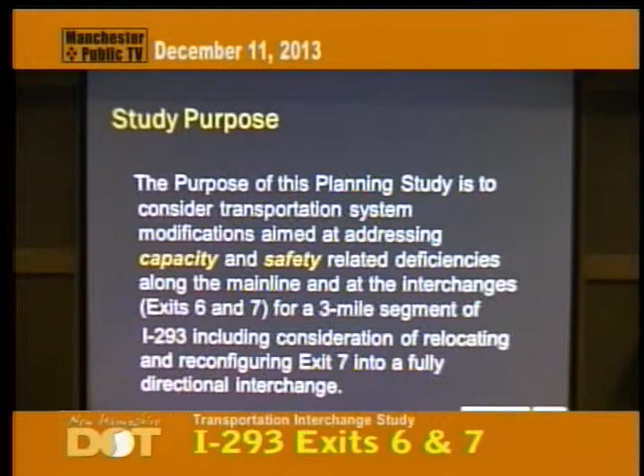We've been working very closely with the Technical Advisory Committee. They've been very helpful to us throughout the process. On that committee included not only the New Hampshire Department of Transportation and the Federal Highway Administration, but also representatives from the Southern New Hampshire Planning Commission, representatives of the City of Manchester, the Town of Goffstown, Town of Hooksett, the Greater Manchester Chamber of Commerce, the Hooksett Chamber of Commerce, the Manchester Community College, and also Senator Boutin sits on that committee.

Throughout the study, we've really tried to focus on public outreach and provide as much information as possible. And in doing that, we've had 5 public informational meetings, so this is our 5th and final meeting for this planning study. We also met 9 times with the Technical Advisory Committee. And then we had a series of briefings with each of the communities, which included meeting once with the Hooksett Town Council, once with the Manchester Board of Mayor and Aldermen, once with the Goffstown Selectmen. We had a brief presentation before the Infrastructure Committee at the Greater Manchester Chamber of Commerce. And we've also had a couple of meetings with the Southern New Hampshire Planning Commission, again just to share information as we're moving through the study.

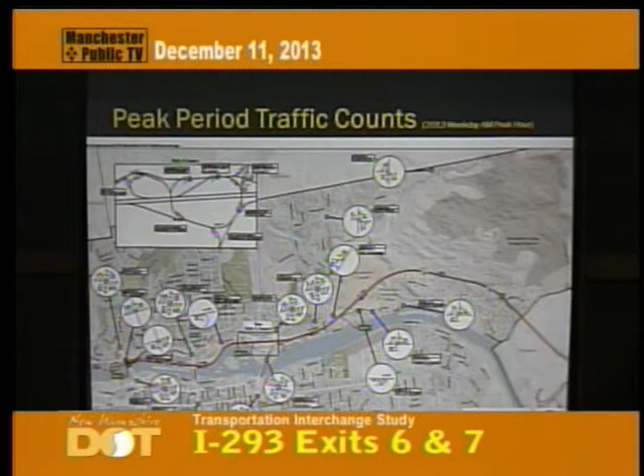Anyway, let me step through, before I talk about the alternatives, some of the initial data and information we have collected. First off, back at the beginning of the study, we went out and collected traffic volume counts, both during the morning and evening peak periods, at about 24 intersections through the study area. In addition, we had round-the-clock 24-hour counts on a number of roads, the highway, and ramps throughout the study area.

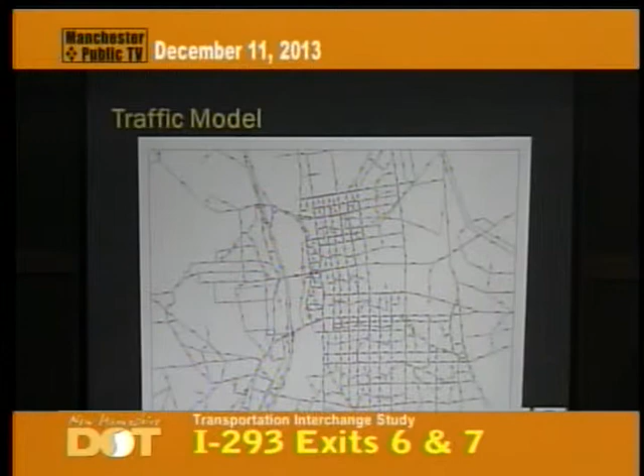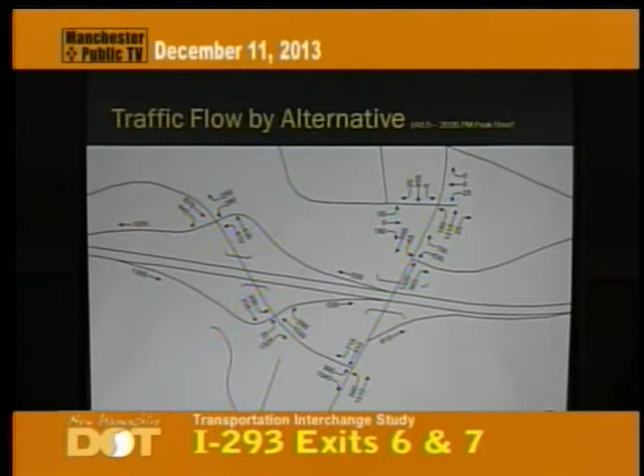The Southern New Hampshire Planning Commission is on our team. They have a regional traffic model, and working with us, they were able to help with the projected traffic into the future, and when we looked at each of the alternatives, we were able to see what type of traffic diversions would occur based on the new configurations of each alternative. I'm not going to go through all these numbers, but for all the alternatives we'll talk about tonight, we have traffic volumes at each of the various configurations.

In addition, we put together a number of environmental and cultural resource maps that were very helpful and allowed us to look at the impacts of the various alternatives.

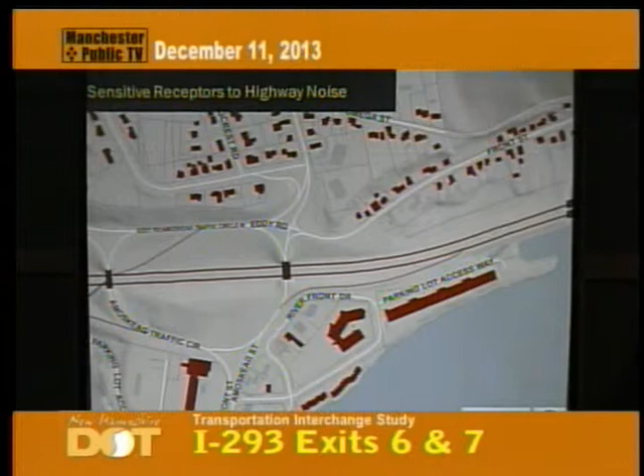We have a number of sensitive receptors to highway noise. Anytime you're doing a highway project, you need to be concerned with the noise effects to sensitive receptors. We've identified in the red areas residential areas, which are important when considering what the impacts to those areas could be. Rare, threatened, and endangered species or habitat have also been identified, and as we move forward and look at the various impacts, we need to be considering those resources.

And also hazardous waste—we've identified a number of site locations where hazardous waste has been identified, including the Manchester landfill, and there's actually a groundwater management zone that extends from the landfill over to the river. All of these need to be considered as we move forward and look at the alternatives.

I do want to say that back in, I think it was September 2012, among the various meetings we had, one was an informal workshop. At that workshop, we asked people to come in and give their thoughts on some of the problems, issues, constraints, and even at that point start coming up with some ideas. That was really the beginning of how we started developing the various concepts.

From that, we put together a list—this is just a partial list of some of the problems and issues that were identified. It's actually much longer than this, but let me give you a sense of the types of things we heard at those meetings.

Poor sight lines along the corridor with curves along the corridor. Queuing onto the highway with traffic from the ramps back out onto the corridor. High-speed weaving, particularly in the southbound direction at Exit 6. We have heavy traffic entering and exiting in very short distances. Short on-ramps where entering the highway, with not a lot of acceleration length—as soon as you enter the ramp, you're onto the highway itself. Vehicle crashes, confusion, and congestion up on the Amoskeag Circle. Again, as I mentioned, highway noise, and limited truck access between Goffstown and the highway.

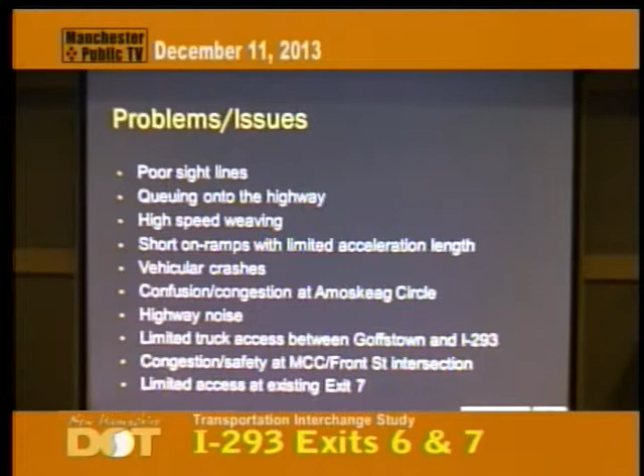Congestion and safety issues at Manchester Community College, right on Front Street near the Exit 7 ramps, and limited access at Exit 7. At the existing Exit 7, there's only access to and from the south, so there are no ramps that allow access to and from the north. That's just a short list of some of the issues identified.

So with that, let me get into the alternatives and run through these for you. First, let me say that for these feasibility studies, we need to look at these alternatives, and we group them into four areas.

First off, anytime I refer to a no build, what I'm referring to is the do-nothing alternative. When we're comparing the impacts of the various alternatives, we always need to compare it to the no build, which means we leave things alone and don't do anything.

We also look at what's called transportation demand management strategies, TDM. That refers to looking at possible actions aimed at reducing the volume of traffic out on the roadway system. Such things might include putting in policies that could encourage carpooling or increase transit usage—things that get people out of their cars.

Also, transportation system management actions are actions that try to look at the existing system and improve its efficiency. They tend to be relatively low cost, not major types of improvements. An example might be if you had a number of traffic signals along a corridor, you may upgrade those to improve the efficiency or coordination between the signals. Those are the types of things we talk about with transportation system management actions.

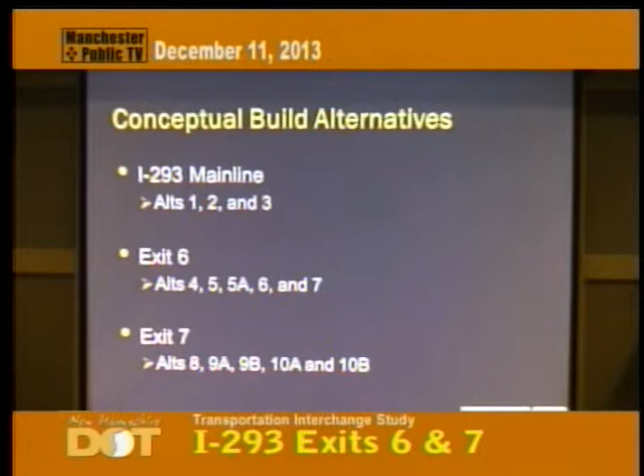So let's step through these. We're going to start first on the main line, I-293 main line. What we have is 3 alternatives. The first, alternative 1—I don't actually have a picture of it—asks: can you keep the main line exactly the way it is? Two lanes in each direction, leave the curves the way they are, and only look at the interchanges. Can you fix the interchanges but leave the main line exactly the way it is? That's what alternative 1 is.

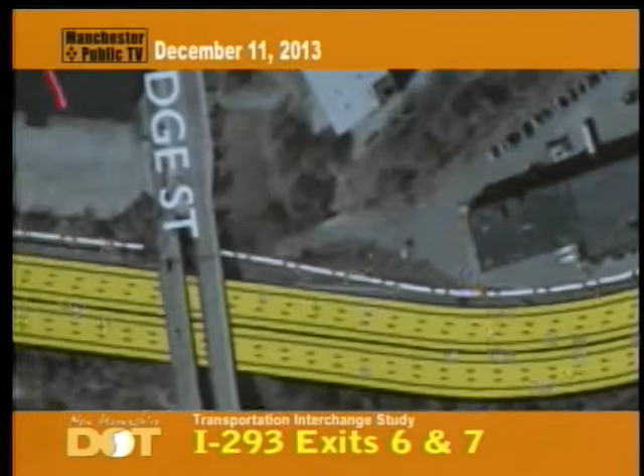Now alternatives 2 and 3, basically for anything from say Exit 6 north, are exactly the same. Both say that we're going to add a single lane in each direction, going from 2 lanes in each direction to 3 lanes in each direction. The only difference between alternatives 2 and 3 is down in the southern area between Exit 5 and 6.

The reason why we created 2 alternatives down in that area is because right in this curve area, we have 2 of those important resources I talked about. One is the historic mill district, located right here, and the other is the river. So when we're identifying impacts, we need to look at what are the potential impacts to the historic mill district and to the river. In order to identify those, we created 2 alternatives: alternative 2 pushes towards the river, and alternative 3 pushes more to the other side.

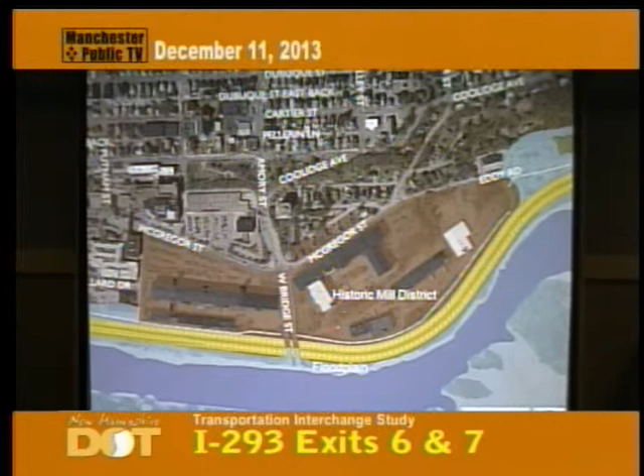So let's take a look at these. First, let me say, when I show you this building located right here on the curve, that's this building here.

Notice here, if you start widening coming towards the building, there's not a lot of room between the highway and the building. The alternatives I'll show you, even the one pushing in this direction, don't take the building. But my point is it's not just about the building—there's operations going on here, trucking activities, and from a fire standpoint, fire apparatus needs to be able to get around the building. Those are all concerns we need to look at.

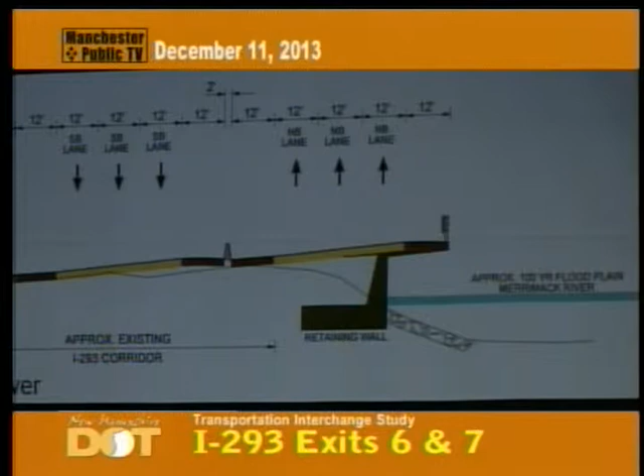So let's look at the two alternatives. Alternative 2 would have this layout—this is looking north, this is northbound, this is southbound. That's the building on the west side, and the parking area and truck operations would be over here. Alternative 2 widens towards the river, away from the west side, maintaining the highway here. There'd be a clear area because you're going around a curve, so you need a clear sight line. You'd have a shoulder, three 12-foot southbound lanes, a median area, three northbound lanes, and a shoulder. Notice that under this alternative, even though we're pushing towards the river, we try to minimize impacts by showing a cantilevered section out over the river, extending the highway over it rather than building retaining walls down into the river.

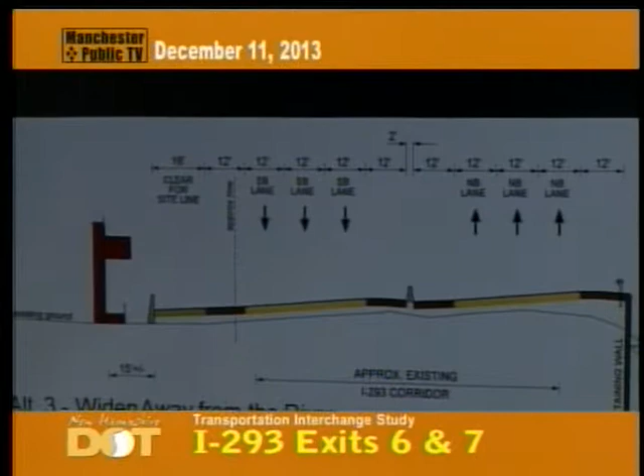If we look at alternative 3, on the bottom here, this one pushes away from the river, holding this edge, still three lanes in each direction. You have your clear line, and here we're not into the building, but clearly into that parking area, which would affect the building's operations. So alternatives 2 and 3 both add an extra lane in each direction—the question is which way do you move the highway through that sensitive area.

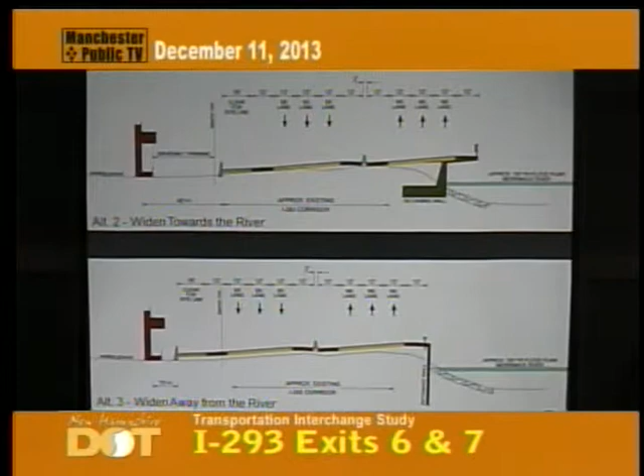Now let's move up to exit 6. The issues today are congestion and confusion up on the circle. You've got traffic on the northbound off-ramp backing out onto the highway, even around the curve. Traffic entering on the northbound ramp has very short acceleration length—once you enter the highway, you're onto it. In the southbound direction, there's a tight weave with heavy volumes exiting and entering at the same point, and a small ramp at Eddy Road where more traffic jumps on after that. Those are some of the issues we're trying to address.

So let's look at the first alternative. Alternative 4 is a single-point urban interchange, located at Amoskeag Street and Goffstown Road. All the ramps would enter directly into a single signalized intersection, similar to what you have at Granite Street at exit 5. The only difference is that under this alternative, the interchange would be above the highway, with the highway running underneath—as opposed to exit 5, where the interchange is underneath and the highway runs above it.

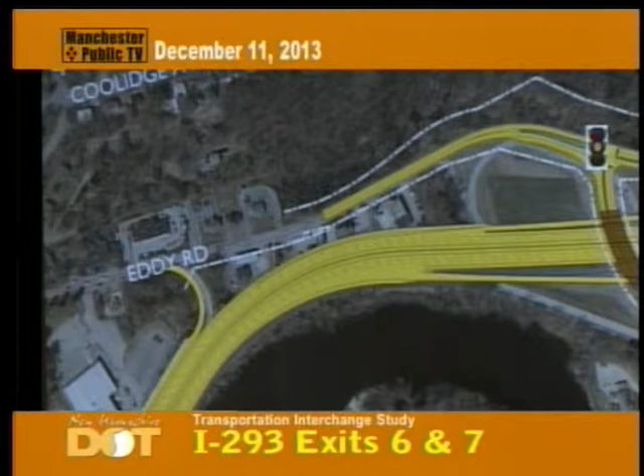That's a long trip. What we would expect is that without this ramp here, those people who do that today would get down to Granite Street and head more onto the local streets. The DOT doesn't want to try to solve a problem out here and end up pushing more traffic onto the local streets. That's the reason why we would show the need to have that, so you don't force traffic down onto the local streets.

The other alternative we have is alternative 5. This is called a diamond interchange. It would connect Eddy Road over to Amoskeag Street, and the ramps would be located right here, so you'd have all 4 ramps at this point. At the intersection at Front Street, you'd have a signalized intersection. It wouldn't connect to Eddy Road, but it would connect to Goffstown Road and to Amoskeag Street.

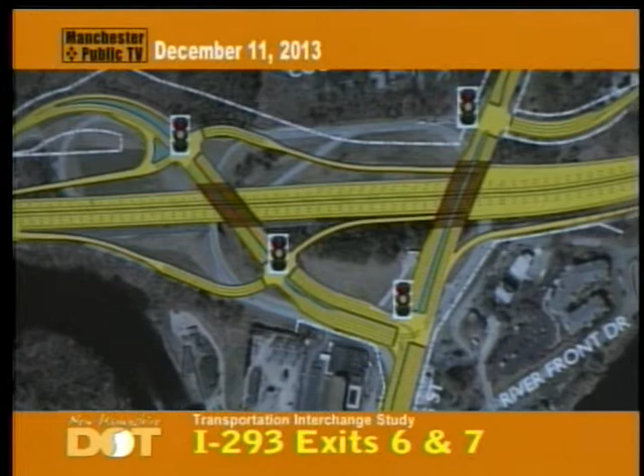Again, because the ramps are located here, there is no longer a need to have that smaller ramp, because any of the traffic from this area that wants to head southbound on 293 can come up and enter the highway right there. So it's a different configuration, but under this configuration, you would not need that other ramp.

Alternative 6 is a very similar layout. It's also a diamond configuration, but it's called a diverging diamond interchange, and it's laid out exactly the same way. The only difference is that in this section between these 2 signals, the traffic that runs between them is actually on the opposite side of the street, on the left-hand side.

The reason why you do that for these configurations is it's actually more efficient. You can have a simple 2-phase signal at these 2 locations. That's the upside, that's the benefit, it's a little bit more efficient. The downside is it's a little unconventional. I don't believe there are any diverging diamond interchanges in New England. They're around the country, so they're a little different. They may be confusing. So again, the benefit is they're a little more efficient, the downside is they may be confusing.

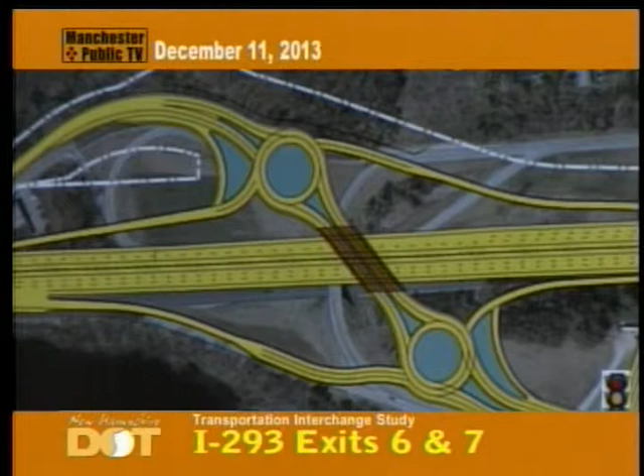Another alternative we looked at is alternative 7. Again, a similar layout, a diamond configuration connecting Eddy Road to Amoskeag Street, but rather than having traffic signals, it would be 2 large roundabouts. Based on the volume of traffic, those would be 2-lane roundabouts, but basically the same general layout. Everything else here would be the same as the other alternative.

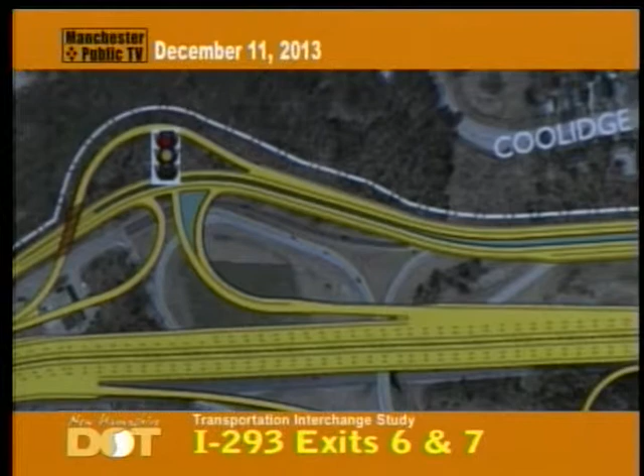The last alternative we have for exit 6 is alternative 5A. We call it sort of an offset diamond interchange. It's sort of a combination of some of the different movements. In the northbound direction, you would have an off-ramp that comes into Amoskeag Street, and you'd have a northbound on-ramp that enters on this side. You would have a full intersection at Front Street, Goffstown Road, and Amoskeag Street.

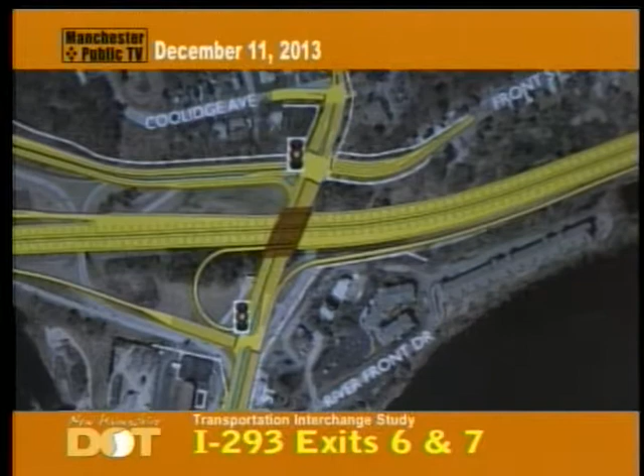Then the ramps for the southbound direction would be down here. We would come off, or get on at this point. All of the traffic that comes from, say, out of Manchester and wants to head south on 293 would come down to this intersection, come in here, and rather than going through the signalized intersection, get on a ramp over the top and then enter the highway that way. So those are the alternatives that we've looked at for exit 6. Let me just quickly step up to exit 7.

This is the existing location of exit 7 at Front Street. Today there are only ramps to and from the south. We want to be able to get ramps to and from the north as well.

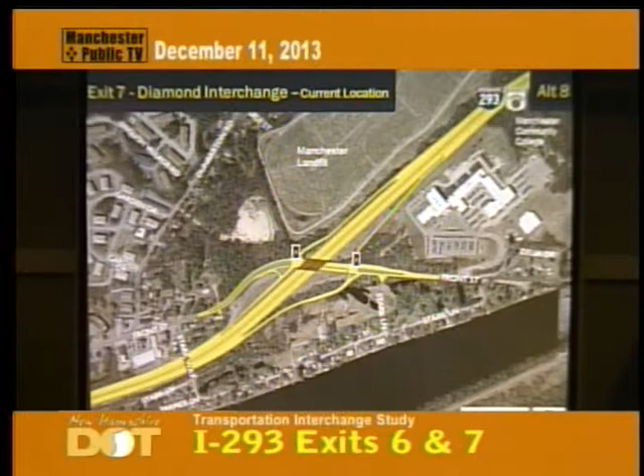What we're also looking at here is not only addressing the problems at exit 7, but also evaluating the potential of relocating exit 7 further to the north. However, one of the alternatives is to look at whether it's possible to reconfigure the interchange at its existing location. That's what alternative 8 is.

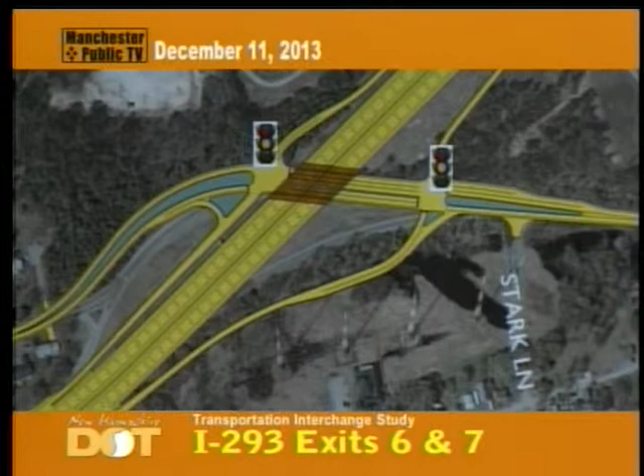Alternative 8 tries to reconfigure the interchange, providing both ramps to and from the south, and also ramps to and from the north at its existing location. You can see it's tight there, trying to fit those ramps in between the landfill and the community college, which is located right here. Also, as I mentioned earlier about environmental resources, there's a wetland area right down in this area where we'd want to put that ramp.

The other thing to mention about reconstructing exit 7 at its existing location is you need to consider the proximity of exit 7, Front Street, to what we would do at exit 6. Those interchanges are fairly close. If you reconfigure exit 7 at its existing location and reconstruct exit 6, the distance between the on-ramp here and the off-ramp here is relatively short, about 1,400 feet.

We've looked at different ways of how it would operate, and from an operational standpoint, we can get the traffic volumes to operate acceptably and safely. But in order to do that, there needs to be a relatively short section in the middle that has an additional weaving lane. So where I said there were 3 lanes in each direction, for a very short distance here, if this interchange is here, there's actually a 4th lane.

The downside is that there are more impacts to the properties behind Front Street and in the area of Stark Lane, because now you have a slightly wider section of corridor. So those are things that need to be considered.

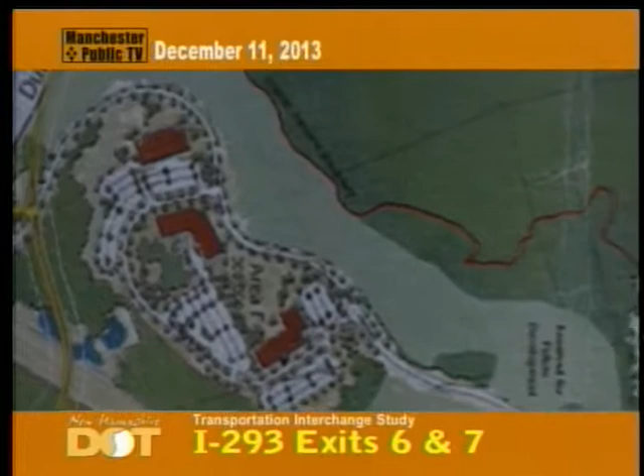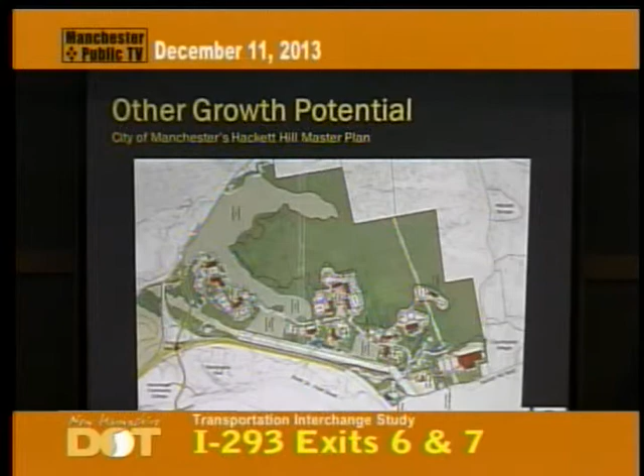I'm not saying this is necessarily going to happen or this is exactly what's going to be, but the city has put together a master plan and said this is an area where in the future this may be redeveloped. We knew that going into this, so when we laid out the Exit 7 reconfiguration, we made sure that it lines up so that if this happens, this could connect into that piece.

Secondly, as I mentioned, the town of Goffstown has an industrial area up here. They would like to see in the future opportunities to bring businesses into that area, and they look at this as an opportunity. If we can improve the connections to 293, this would be an opportunity to do that. So I lay those out as considerations we need to be thinking about as we're moving forward, weighing the advantages and disadvantages of each of the different alternatives.

All right, with that, let me step through this as quickly as possible and then summarize our findings. I want to run through the evaluation of the alternatives — how did we look at all those alternatives and how did we evaluate them?

First, let me say that when we tried to do the evaluation, we broke it out into these areas. One was highway needs. Remember, the study purpose is about addressing the capacity and safety issues along the corridor, so that's our primary study purpose. Obviously any alternative needs to meet that study purpose — are we actually improving capacity and safety?

Also, I mentioned community needs, and primarily what we heard from communities was that economic growth is an important part of the community needs. So we tried to measure how each alternative did for those. And then, as I said, we have all these various resource impacts that, as part of the feasibility study, we need to identify.

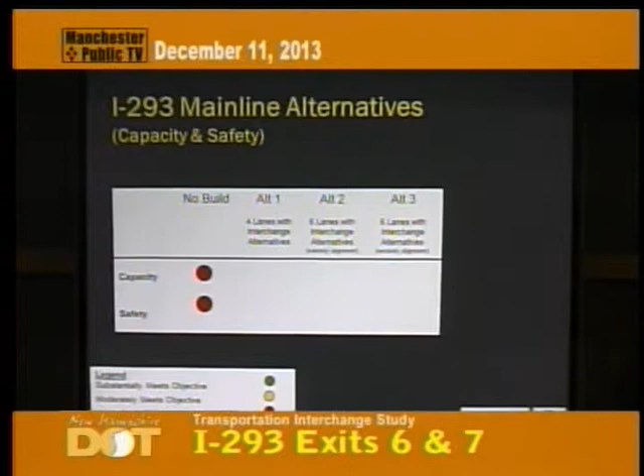Under alternative 1 - leave the main line alone and just concentrate on the interchanges - from a capacity standpoint, our analysis says that when we project traffic out 20 years from now, that won't be enough. You're going to need that additional lane. So we would not meet the capacity criteria under alternative 1. Obviously, if you upgrade the problems at the interchanges, you are starting to address the safety issues, so from a safety standpoint, alternative 1 would fit into moderately meets the objective.

Now if we look at alternatives 2 and 3, this is adding an additional lane in each direction, the only difference being which way we move the highway. Again, all we're talking about in this table is capacity and safety - we're not measuring impacts to the river or the historic district. Under those, both alternatives 2 and 3 would substantially meet the objectives of improving capacity and improving safety.

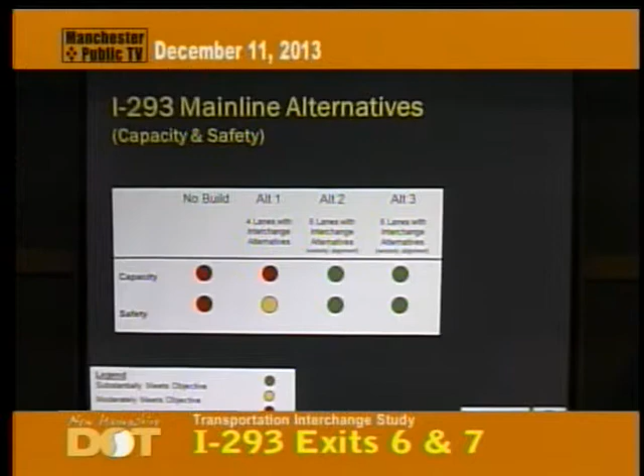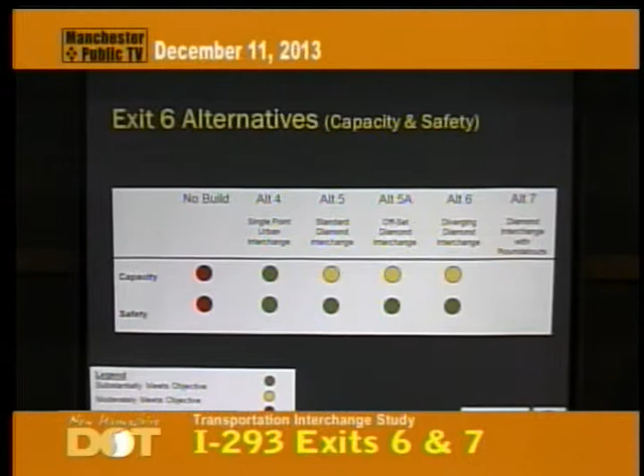If we look at each of the diamond configurations - the standard diamond, the offset diamond, and the diverging diamond - each of those, from a safety standpoint, would completely address the safety issues. They fall into the category of moderately meeting the objective because we can get acceptable levels of service at those intersections. However, under the diamond configurations, there are some issues with queuing between the signals and some spacing issues between the signals, so it doesn't distribute traffic quite as well as the single point interchange. But we would characterize each of those alternatives as moderately meeting the objective of capacity.

The final alternative, alternative 7, is the one with the roundabouts. Our analysis shows that from a capacity standpoint, that's not going to work, so this is probably the last meeting you're going to hear about that alternative, because it simply doesn't work from a capacity standpoint. Obviously it works from a safety standpoint because it would improve the situation out there today, but it doesn't work from a capacity standpoint.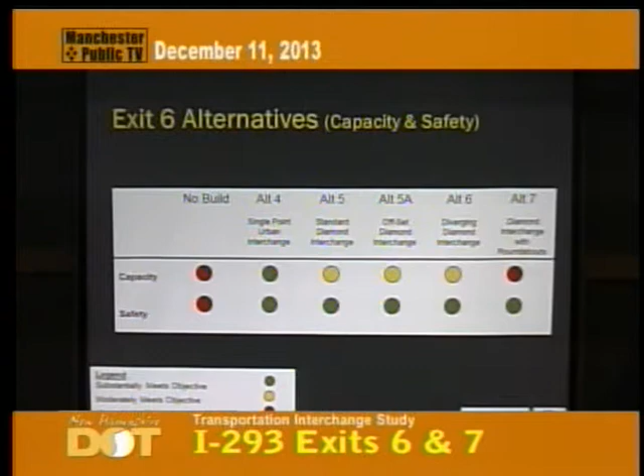So let's move up to exit 7. Again, alternatives for exit 7.

Same thing, you don't do anything. You're not addressing either capacity or safety.

Alternative 8 is reconfiguring exit 7 at its current location at Front Street. Under that scenario, our analysis shows that operationally, we can make it work. Safety is certainly an improvement, so we put it in the category of moderately meeting the objective. But we need to keep in mind the issue of spacing between exit 6 and 7 - it's not an ideal situation. Those interchanges ideally should be set further apart, and that's why it falls into the category of moderately meeting that objective.

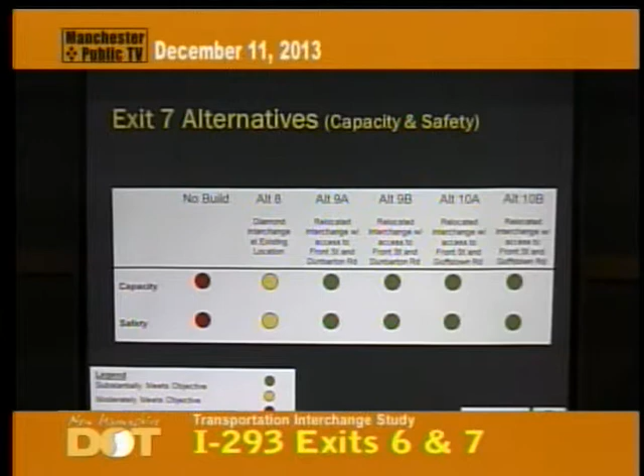Now, each of the alternatives of relocating the exit 7 interchange further to the north - both alternative 9, which connects to Dunbarton Road, and alternative 10, which actually goes over the river and extends over to Goffstown Road - from a capacity and safety perspective, both substantially meet those two objectives. We haven't talked about the economic benefits yet, but simply from a capacity and safety perspective, relocating the interchange further to the north meets that objective.

So what I want to do here, and I'm not going to go through all of them, but from an economic perspective, as I said earlier, any improvements to the corridor at exit 6 or exit 7 is going to improve the economic vitality of the entire region. However, specifically for this project, what we've heard from the City of Manchester and the Town of Goffstown is they're particularly interested in what's happening at exit 7. So I'm going to focus here on the exit 7 alternatives and how that falls into economic considerations.

So here, what we're measuring against is not capacity and safety, but how, from an economic perspective, each of these alternatives meets the objectives of the Hackett Hill Master Plan and improving connectivity to Goffstown. If we use the same method, under the no-build, you don't do anything, obviously we're not going to meet those objectives. If we do alternative 8, reconstructing the interchange at its existing location, we're not going to be able to meet the objectives of providing improved connection to Hackett Hill, because it's further to the north, or improved connectivity to Goffstown.

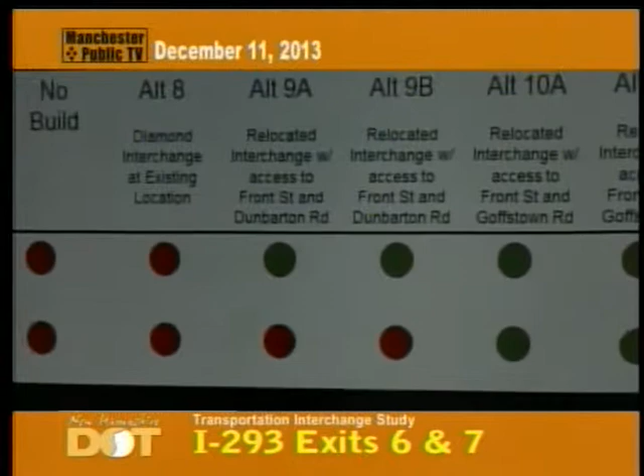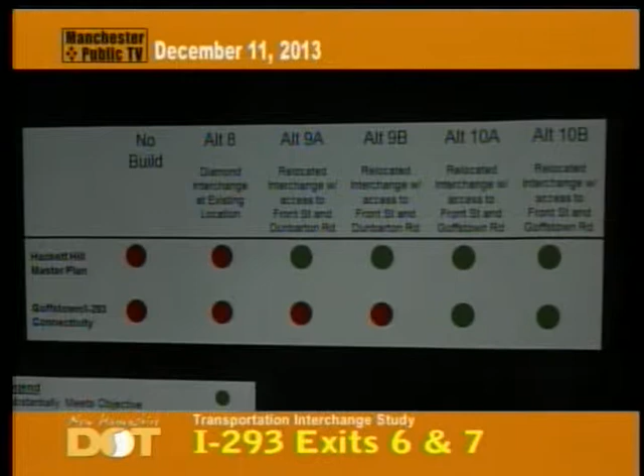Alternative 10, which extends across the Black Brook, would obviously meet the objective both from a Hackett Hill standpoint and from improving connectivity to Goffstown. So that's how the alternatives break down relative to how they meet the capacity, safety, and economic considerations.

So let me just very quickly touch on some costs, going back to exit 6. These are just construction costs, they don't include right-of-way costs - there are other costs involved, but we want to compare apples to apples here. Construction costs at these interchanges are fairly substantial. The single-point urban interchange would cost somewhere between $54 and $60 million. Each of the other diamond configurations would run between $38 and $45 million.

We come up to exit 7, reconstructing it at its existing location - that's alternative 8 - which would run between $33 and $36 million. Relocating the interchange, but not crossing the brook, just going to Dunbarton Road, would run between $36 and $41 million. And ultimately, if you extended across the Black Brook, the cost would be between $42 and $48 million. So that's just to give you a sense of the range of dollars we're talking about for these interchange upgrades.

So, with that long-winded presentation, what I'm going to try to do here is summarize our findings for you. After all of this analysis, after all the meetings we had, what does it all say to us? And then when I finish that, we're going to talk about what are the next steps and where do we go from here. So let's talk about our findings.

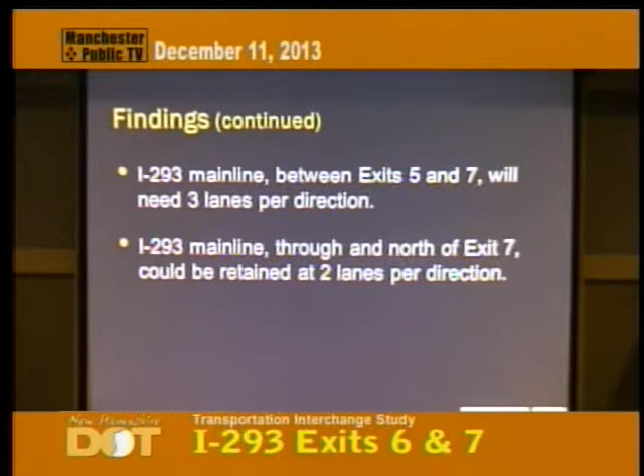Each of the exit 6 alternatives, with the exception of the diamond interchange with the roundabouts, operates acceptably and meets the study purpose. As we move into the next phase, you're probably not going to see the alternative with the roundabouts anymore because that's really going to fall out, it doesn't work. The single point interchange probably operates the best of them, but the other configurations operate acceptably, so you may not want to throw those out just yet.

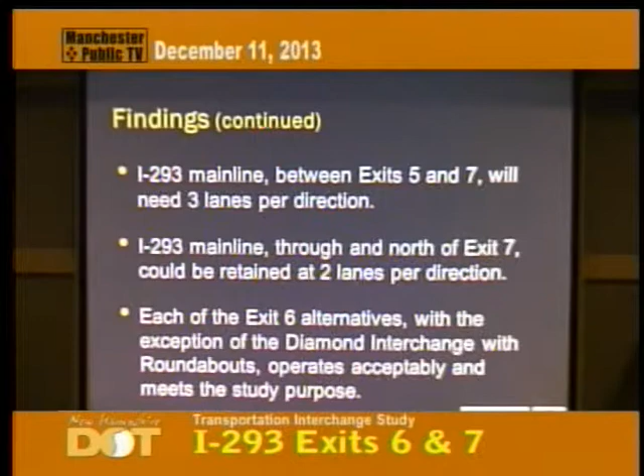At exit 7, reconfiguring exit 7 at its existing location could be problematic given the close proximity of exit 6. Our analysis shows you could reconstruct exit 7 at its existing location and get acceptable operations, but it's not ideal, and there will always be an issue with the spacing between exit 6 and exit 7.

Finally, relocating exit 7 to the north will meet the capacity and safety study purposes, and it will also support connectivity to the important future economic development areas, both in Manchester and Goffstown. So, everything I talked about, that's what the study says at this point, the completion of the planning study. Those are our findings, that's what we're reporting to the New Hampshire DOT.

Now let me quickly talk about next steps, where we go from here. This process of these major infrastructure projects, like reconstructing interchanges, goes through a 3-part stage. Part A is the planning study, that's the study we've completed. At the end of this month, end of December, the planning study is done. This is the final meeting on the planning study.